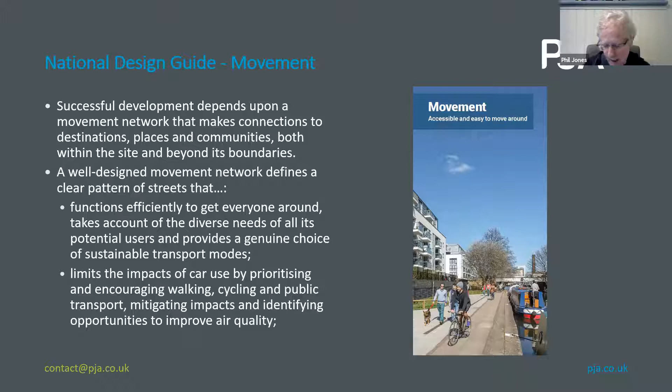Connections to destinations within the site and beyond its boundaries, clear pattern of streets, but it's all rather wordy, and I think that's perhaps one of the charges that have been levelled at the National Design Guide. I think the Model Design Code is putting a bit of meat and a bit of certainty behind that.

So we've got the Model Design Code and we've got the guidance notes where we look for some key information. Obviously it's still fairly high level. And when it comes to streets, the guidance notes and the Model Design Code refer to Manual for Streets, and we know that we are going to get a new Manual for Streets, which is going to bring together Manual for Streets 1 and 2 later this year or perhaps early next year.

The two are kind of informing each other, so the thoughts in here about typologies and how it all fits together, I'm sure will be reflected. I'm on the project board for that. I'm not involved in the writing of it this time, but I've been having conversations with the WSP-led team, with Andy Cameron and others, ITP, that are producing it. I know they're watching very carefully how this all comes down.

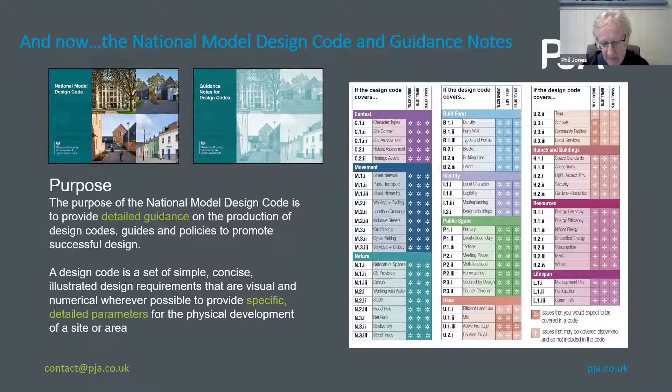So it's words like detailed guidance and specific detailed parameters that give me a bit of confidence that we're getting somewhere, because one of the charges against the original Manual for Streets is that it didn't quite hit the spot. I think there was some good stuff in it, and it did move things on, but it didn't quite have the impact that it should have done.

I remember Tim, who many of you will know was part of the drafting team, quite distinctly saying we should have as few numbers as possible. When we give people numbers, it just stops them thinking. Let's take it away and make engineers think. But of course the culture of engineers is pass fail, and understandably so, because they are held liable so often, so engineers do need some certainty.

I remember getting very cross with a highway authority DC officer who said, can't work to Manual for Streets, it's too fluffy. But I came away thinking, well, she has a point actually, and if it's not working for her, then it's not working. So I think this is a chance for a bit of a reset.

Manual for Streets said a lot about hierarchies and this idea of a dual hierarchy of movement and place. When I first saw that diagram in the Model Design Code, street hierarchy, it was purely about movement. I thought, oh gosh, are we going backwards here? It talked about the hierarchy following those movement strategies, and we seem to have lost this diagram that was in Manual for Streets and Manual for Streets 2, led by the work of Peter Jones, that talked about place status alongside movement status, giving this dual hierarchy to streets.

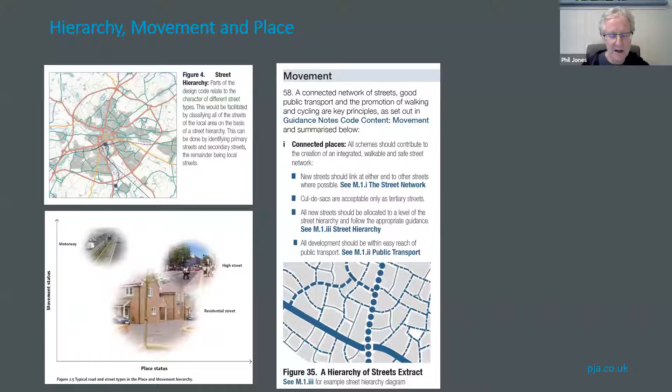But actually, I think the way it's been handled still works, because there are some good words in here. Different streets play different roles depending on movements, but then it talks about built form and the uses around the design of the street space itself. Street types include multifunctional streets, all having different place and movement functions. So I think the idea of streets having place and movement functions is in there.

We just don't see it in this sort of two-dimensional hierarchy. I know there are some big people like Colin Davis who've argued passionately that you can't put place on a graph like this, and it doesn't work. Place is too complicated, too nebulous to be put on that simple linear scale. So maybe there's something in that.

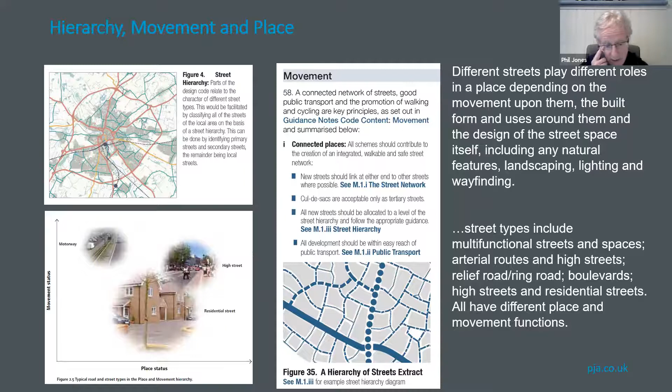So what we actually get is that all of those kind of place functions of streets are talked about in the public space section, not in the movement section. I looked at that and thought, actually that kind of works, and that's where you find the more detail about how we design these kind of linear spaces, I suppose, that we can think of them as.

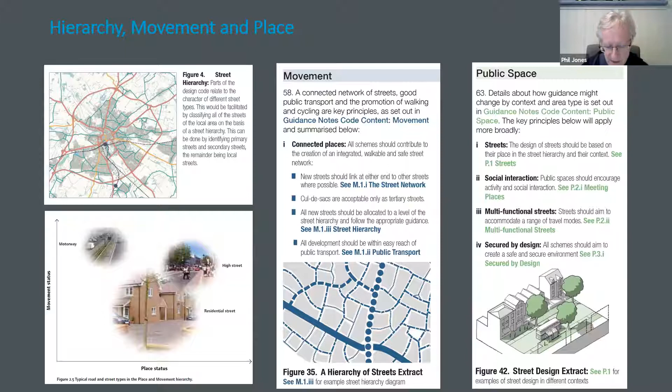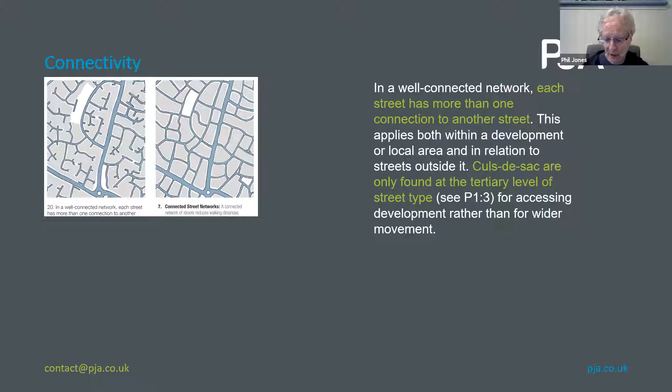Connectivity, I like the things he talked about with connectivity, and I like this simple rule, which I hope will work when developers test it: each street has more than one connection to another street, and I think that's pretty good, really. It talks about street types and within the typology says we should only have cul-de-sac at the tertiary level of street type, so that's kind of interesting. I also like what he says about filtering.

Filtered permeability. This image is from Waltham Forest, which has been held up as a really good exemplar of filtered permeability within a grid network. And it's positive about that - it talks about permeability for different users being controlled.

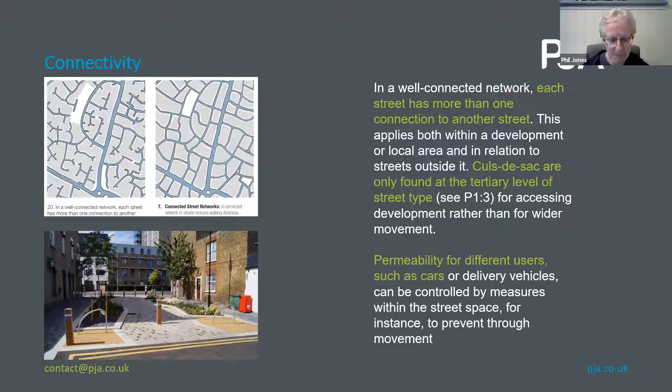By measures within the street space to prevent through movement. I like that. When Manual for Streets came out, many active travel campaigners thought it was too pro-permeability for motor traffic, and maybe this is redressing the balance - so we can have connectivity for all modes, but more connectivity for the most benign, sustainable modes. That's a really interesting development.

It gets away from so much pod development with private drives that design out connectivity and create these executive homes where people who live there prize the fact that nobody else can walk past their house - what Sue McGlynn called kinetophobia, the fear of movement. So hopefully it gets away from this.

If we're going to drive connectivity beyond the site boundary, that's going to take really robust policy or decisions by planning authorities, because it's often constrained by land ownership. Is our planning authority really going to refuse consent when there isn't more than one means of access to a site? That's going to be very interesting to see - is it going to challenge that?

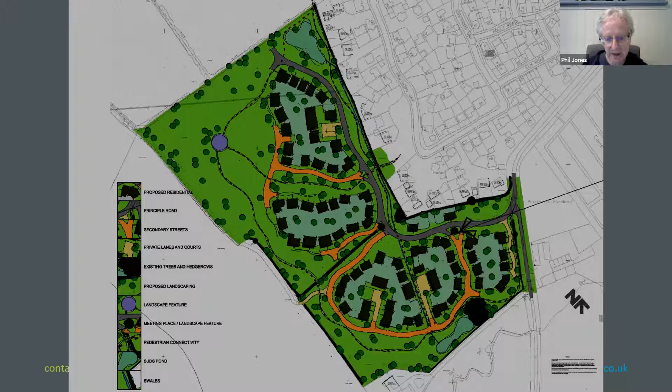I think there's some good words here about public transport being key to providing people with choice in everyday journeys. It says a site has good public transport accessibility when there's a stop within walking distance. I thought about that - actually, I'm not sure that's enough. You could achieve that if your public transport stop had one bus a week. So I question some of the stuff in here about public transport.

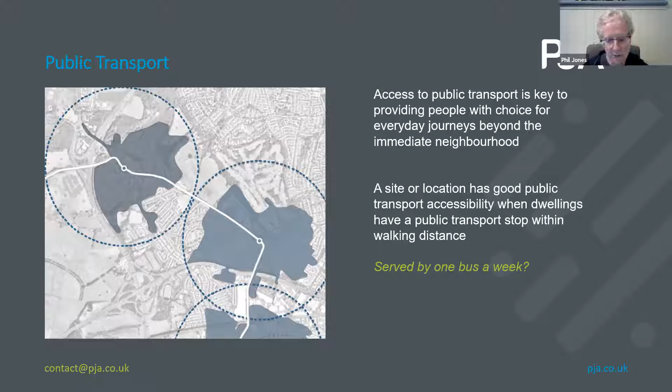There are other good references we could refer to - the work of Tim Pharoah with CIHT has some really good practical guidance on how we plan and design for buses and what good public transport access looks like. I think that little bit of the National Model Design Code probably needs a bit of beefing up.

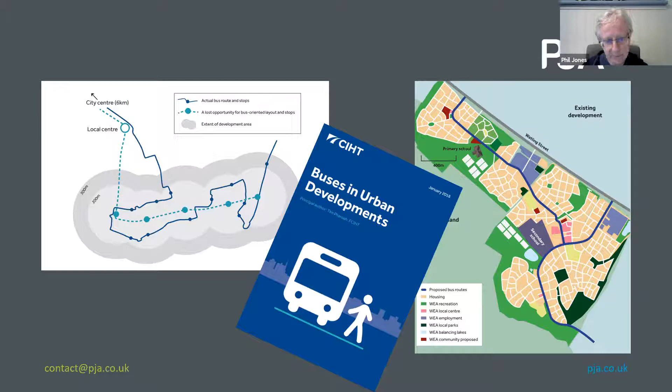But active travel is dealt with very well. It's interesting that within the guidance it's actually a tier above public transport - raised up to the level of connectivity, which perhaps shows its importance for health and well-being. There are little details too, like continuous footways slipped into the diagram - I think that's really nice.

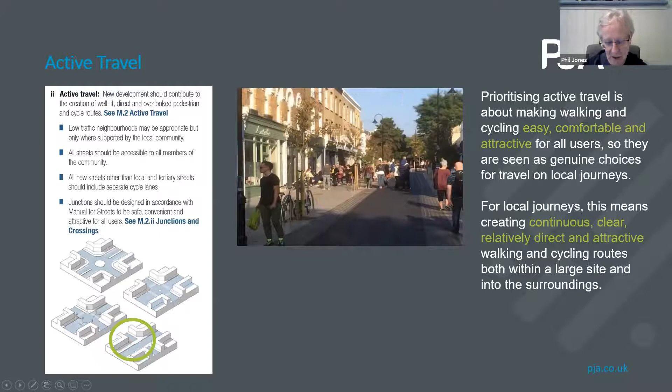Again, this is Waltham Forest. It's good to see local low traffic neighbourhoods cited - they're supported in Local Transport Note 1/20, which has just come out, and Gear Change, the government's cycling and walking plan, very positive about low traffic neighbourhoods. So it's good to see that in the National Model Design Code, but it says maybe appropriate only where supported by the local community - that's a bit weak-willed.

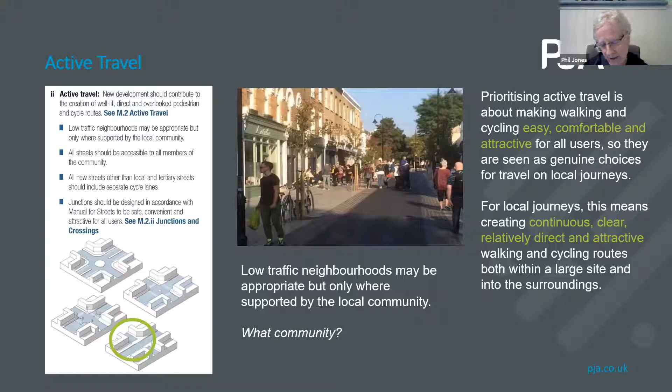Is that a kind of reaction to some of the negative press, unnecessarily negative I think, that we've seen around low traffic neighbourhoods? And if this is new build, what community can we even ask about that? So I think we could be a little bit stronger, because Active Travel England is going to be a player here. It's not mentioned, probably quite rightly, but the Department for Transport is working out what Active Travel England will do - one of its functions will be as a statutory consultee within the planning system, so we'll have something to say about that.

And then so streets and places, we find that in the public space section of the design code. So here we talk about different types of street and public space, referring back to the hierarchy. So that's all good, and we see different typologies of streets. These are exemplars, and they may not be exhaustive, and then where we might see them, and that's all going to come in the codes.

That's great, and they talk about the dual functions of movement and place. So as I say, it's in there. It's just not kind of represented in quite the same way as Manual for Streets.

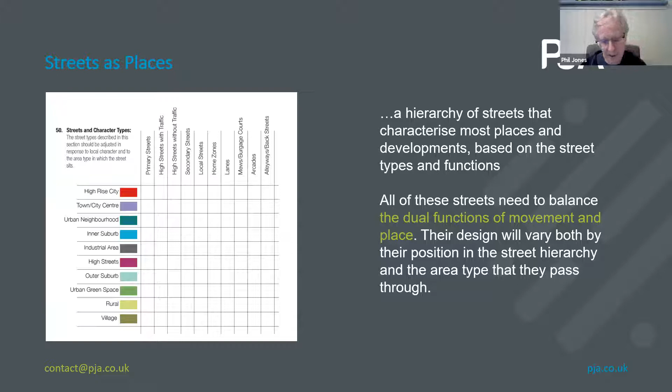And then we get the typologies, and I like that. There's some details I need to look at - are they right? It'll be interesting to see how Manual for Streets takes this forward, even though there might need to be a bit of iteration coming back. And I like the little pop-ups that work in the PDFs that tell you a bit more about it, and we get these isometrics that show the relationship between the buildings and the movement on the streets and how that all works.

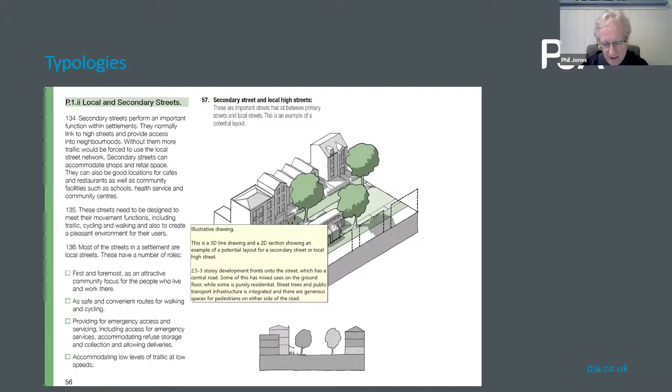So I think they're very good. And it's interesting - we've been doing some work recently for Homes England as a kind of stopgap, possibly before Manual for Streets comes along, and we're going to talk about this at their design day in April. Here we talk about typologies too, in the context of big urban extensions: principal main streets, secondary street, tertiary streets, and then edge lanes and private driveways - what features we might see, categorizing them with place, movement, access, parking, drainage, which are the street functions in Manual for Streets. So there's some kind of link up there with the thinking we've been doing, which is good.

And then the images about what green looks like for those different typologies, so this all seems to be going in the same direction. And then, of course, there's this intention that all new streets are going to include trees. That seems to me a little simplistic, and I'd be interested what others think. Obviously trees are great, we all love trees, but is it right that every street should have trees in it? I don't know, but it's in there. At the moment, very few new streets have trees, and when they do go in at planning stage, they tend to disappear. Amy Burbage of Homes England has done a great presentation about the disappearing trees between planning and implementation. So even if we get some street trees in, that's great.

So that's my final slide. I think the guidance is good, it's well structured. I think it builds on and reflects Manual for Streets principles. It's got a slightly different take on how movement and place is talked about, but I think it works. I think public transport needs a bit more detail, but I think active travel is handled well. I'm sure others will have detailed comments, but for me, I think it's a good document, and I wish it well. So thank you very much.

Helen is a planner and urban designer and has extensive experience of working with and for local authorities. Helen was a planning and design quality lead at Homes England and has therefore substantial knowledge of planning and delivering large-scale and complex development. Currently, she's Principal Strategic Planning Officer at North Hertfordshire District Council. Helen, over to you.

Yes, so my presentation looks at securing quality through the planning system and how the National Model Design Code fits into that. And that's the current planning system we have, not the one suggested in the planning white paper. So to me, good design is a key aspect of sustainable development and is indivisible from good planning. This well-known line from planning guidance over many years has now been lost, which I think is a real shame, as it decouples that important link. The focus now seems to be on the appearance and aesthetic value of design rather than sustainable function.

Oops, it's just stuck. It's frozen - maybe you want to go out of screen share and back in again? Oh no, it's okay now. It's just having a little think.

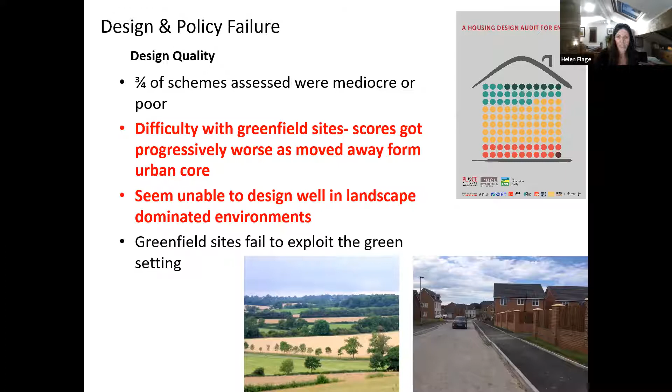So whilst it's unacceptable to have such poorly designed developments, a lot of these developments also have very poor or no green infrastructure and have led to more loss of nature and a negative environmental impact. So there's been a policy failure to deliver design quality, and for me, one of the key failings is the inability to plan and design in a green setting.

It's interesting to look at this, because what do the statutory and policy requirements actually require planners to do? We're only actually required in our local plans to identify allocations on a proposals map with a red edge, what I call the blob. Our system, in terms of the development management order, only requires a red line to be submitted for outline planning applications with an indication of where access is going to be taken, if that's a reserve matter. Then a design and access statement that in the worst cases just describes a poor layout with lots of illustrative material.

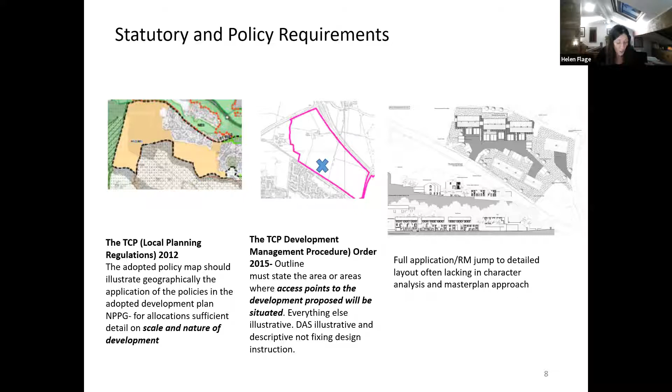So how do we planners try and secure design quality through the planning system? To address those failings, lots of planning authorities try and go above and beyond to try and secure quality. A key tool for authorities is the master plan. The master plan is the most common design tool used by local authorities, and a master plan is the spatial interpretation of a vision.

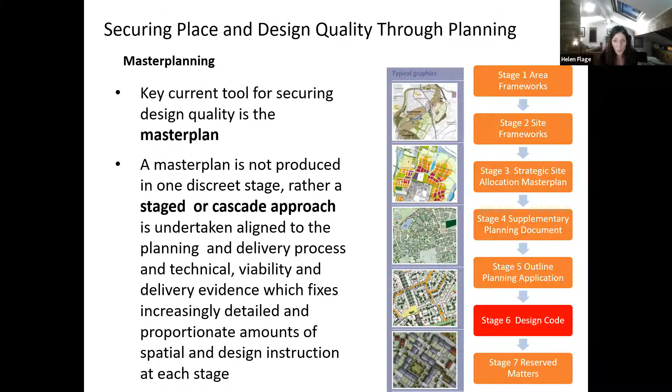But it's not produced in one stage, it's produced in a staged or cascade approach, which is undertaken aligned to the planning and delivery process and the technical and viability evidence. So it fixes increasing detailed amounts of spatial and design instruction at each stage. Just to quickly look at those stages.

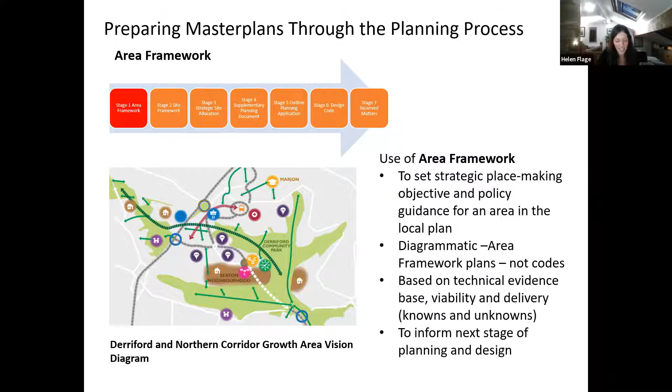Area framework plans are produced as part of a local plan, and these set out high-level structuring and organising principles for an area or a site in a spatial diagram, based on a proportionate evidence base. This is an example from a local plan, the Plymouth local plan around Derriford. So this framework plan is providing the same in relation to a commercial district centre that requires major redevelopment. It's setting a framework, not a code, a framework to guide further design development when technical information and market conditions allow.

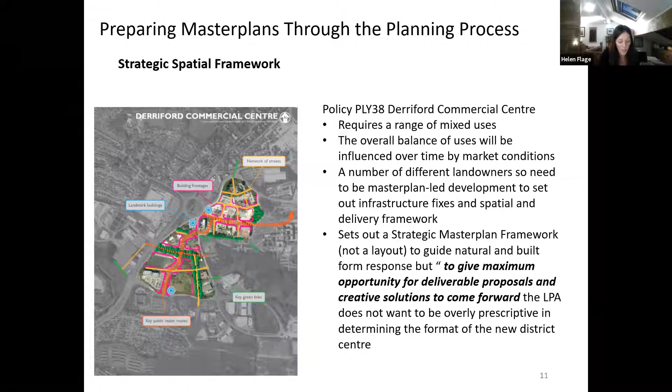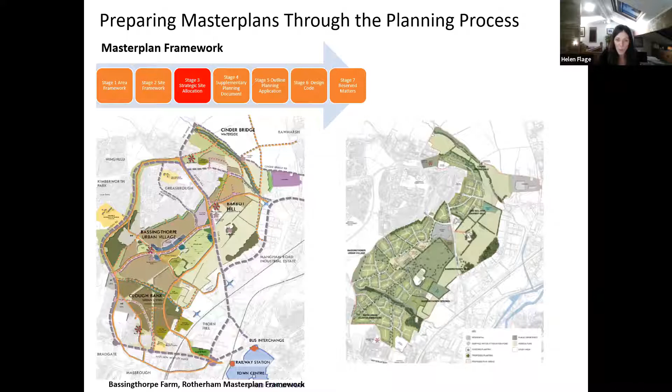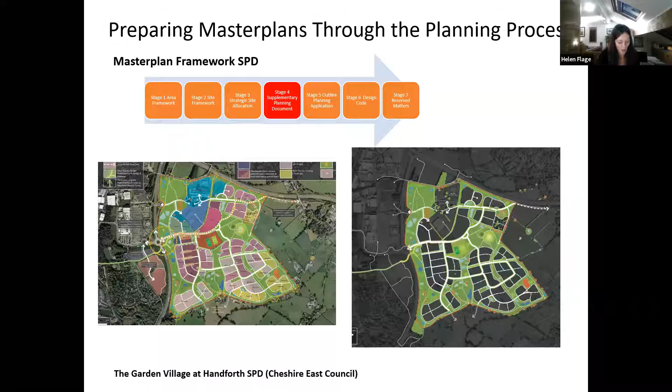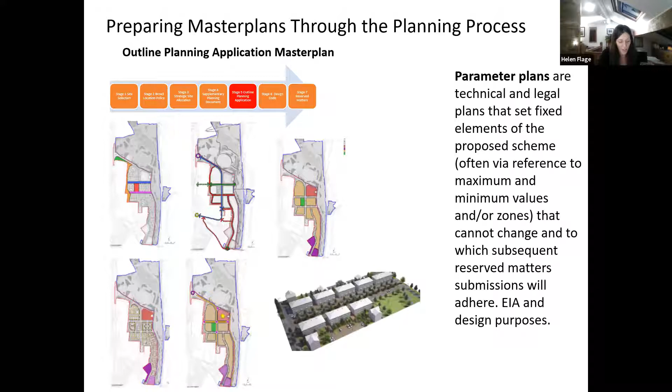In terms of outline planning applications, if a development requires an EIA, then parameter plans need to be produced to enable the environmental impact to be assessed and mitigated. Parameter plans can, at the local authority's discretion, also be used to fix design matters, but legislation doesn't require this.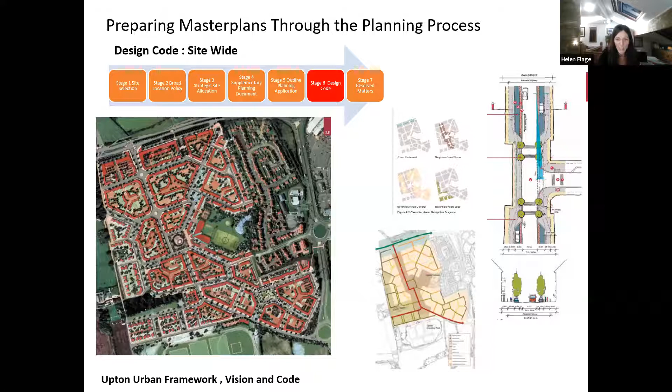In terms of design codes, they're frequently used at the moment in practice, usually for large sites, more than 500 units, either site-wide, as this well-known design code at Upton shows, with a regulating plan and clear design instruction, or for very large sites, they're produced on a phased basis. They can only be implemented if a detailed master plan has been produced that provides the spatial vision accompanied by a regulating plan — that's the plan on the right here.

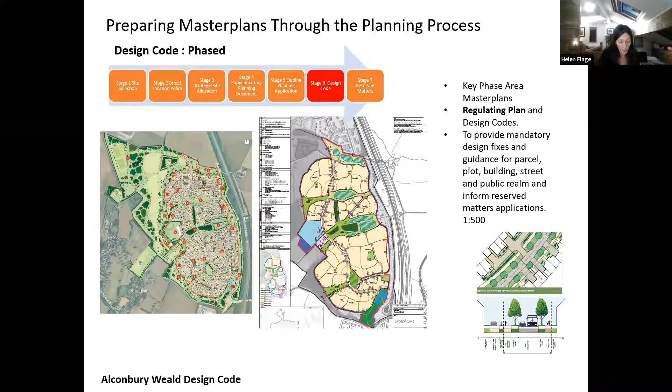And they're most commonly produced at the moment as a pre-commencement condition on an outline permission, but they can also be adopted as supplementary planning documents. Importantly, they are produced close to the point of delivery when there's sufficient market and technical information available.

And finally, reserved matters. In terms of the steps that the government could take to better embed place and design quality in the planning system, it could require local planning authorities to produce area and site-specific master plan frameworks in their local plans that would then receive full policy weight, and they could also change the development management order back to how it used to function in 2006, with a set of parameter plans to fix design quality.

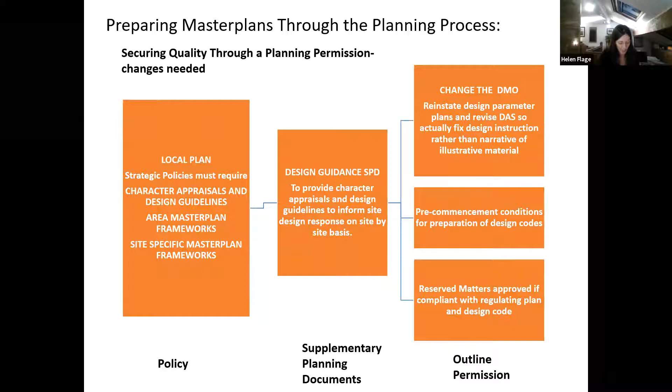These would be needed to validate outline planning applications, together with a complete rehaul of the design and access statement system, so that they actually fix design, instruction and intent.

So how does the National Model Design Code change things? Well, it's not introducing anything particularly new — it's based on lots of previous guidance that's been produced in the past, but obviously it's been updated. In terms of implementing such area and site-wide codes, the NPPF, as to be amended, requires local planning authorities to prepare design codes or guides, and these should be produced as part of the plan or as a supplementary planning document. So importantly, the NPPF isn't going to say local authorities have to produce codes — they can just produce a guide. And that's an important point.

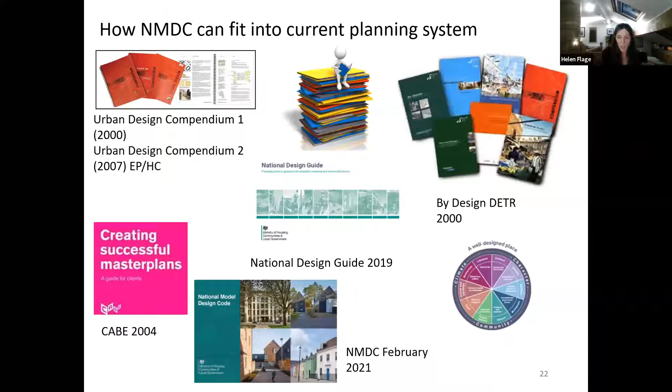It would be possible to set out in strategic policies in a local plan where master plans and design codes should be produced on an area-wide or site-specific basis, and that currently happens in practice anyway. So adopting a design guide or code as a supplementary planning document is the most sensible route to ensuring it receives sufficient weight in decision-making as a material consideration, but you'll need a policy hook to do this. Requiring better design documentation to support planning applications is possible at the local authority's discretion, and local planning authorities can attach a requirement for a site-specific design code as a condition.

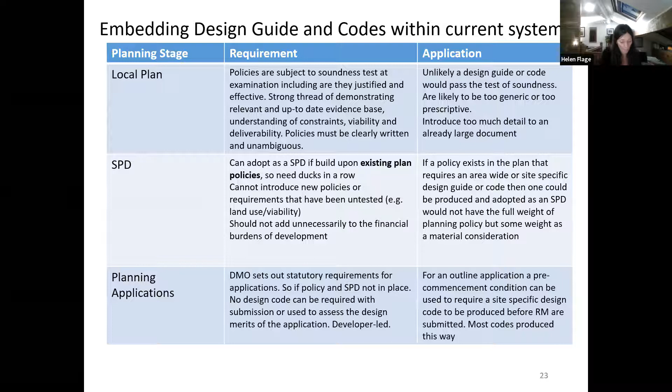So some final observations I have on the National Model Design Code relate firstly to terminology. There's a new definition of a design code in the guidance that differs from the definition in the National Design Guide and NPPF, and this new definition seems to decouple the design code from a master plan. Design guides and codes are used together throughout the document, but they're very different things - a code needs a regulating plan and a guide does not. Parameter plans are used a bit out of context, which could be misleading.

I think there's an underestimation of the analysis required to accurately fix design instruction, especially for large sites. This table and these plans set out the typical information you need to fix design decision-making and instruction, particularly for larger sites. So I think there's a bit of an oversimplification of the master planning and coding process for larger sites.

And there's a lack of reference to other planning and environmental legislation that design decisions can impact on, and how this would be taken account of in the coding process. The area types set out feel like a slight oversimplification of reality - I think many areas straddle these zones and need comprehensive redevelopment, and coding them would be a superficial exercise without the evidence, master planning, and market realism required.

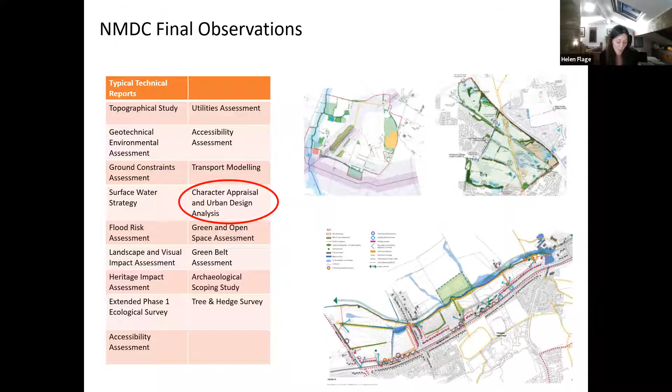So there's a risk of coding leading to a traditional approach that might not necessarily embrace working towards zero carbon and using environmental technologies. Finally, from a town and country planning perspective, I find the guide a little bit too urban design led, which you might not want to hear.

And I'm not convinced that the street, the block, and the public square should be the primary organising components for new places, especially on greenfield sites. And I don't think this has worked.

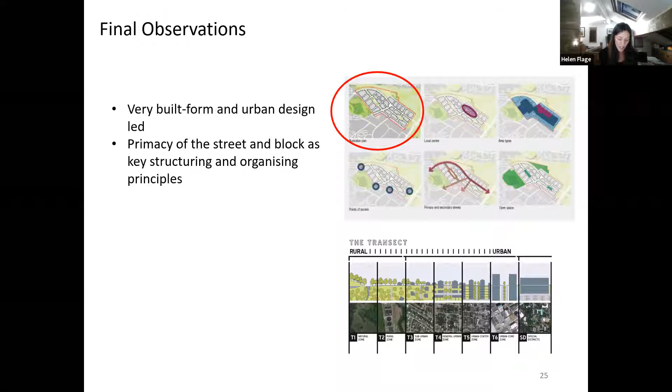So I think we need a more landscape-led approach that prioritises spaces and routes for people and nature, and that green infrastructure is used as a key structuring element in how we plan and design, rather than a second thought. This will help restore nature, mitigate and adapt to climate change, and restore public life, reconnecting people to each other and also with our environment.

So that's the end of my presentation.

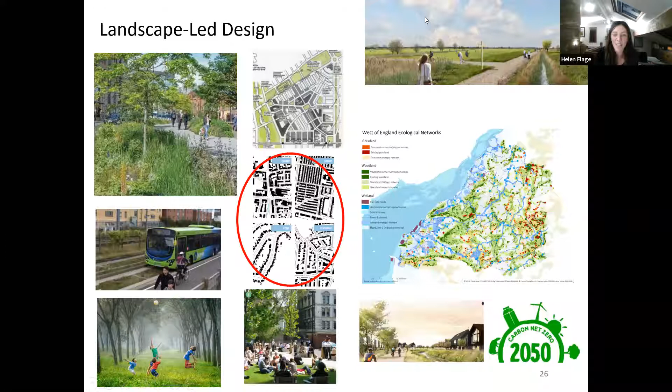Thank you very much, Helen. I like your call for more integration of landscape and the environment - I think we've all experienced how important it is in the last year. I think another point you made leads us nicely onto Tony, and that's market realism. I would have to go back to the code about how much it actually says about having that evidence base of what's deliverable and achievable, but maybe somebody else knows more about what the code actually says on that subject.

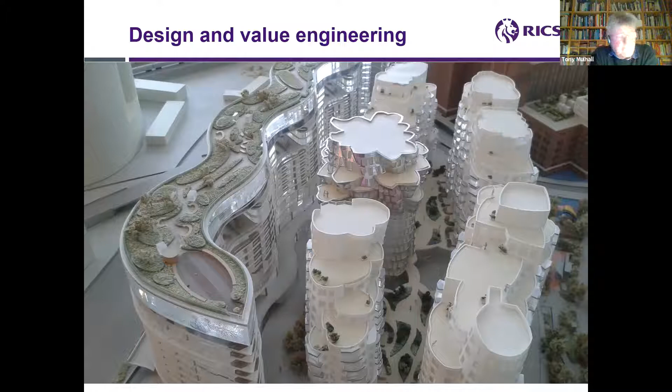Now, it will be very interesting to see where the private garden and outside space has moved in the light of our experience up to now.

I have nothing left to say other than thank you for listening. It's a very interesting area, and we're very interested in how this interfaces with market behaviors and how design can be used by developers and how they can be encouraged to create great places, design them well, and get the benefits both for their customers and for themselves, and deliver better places for us to live in. So thank you very much.

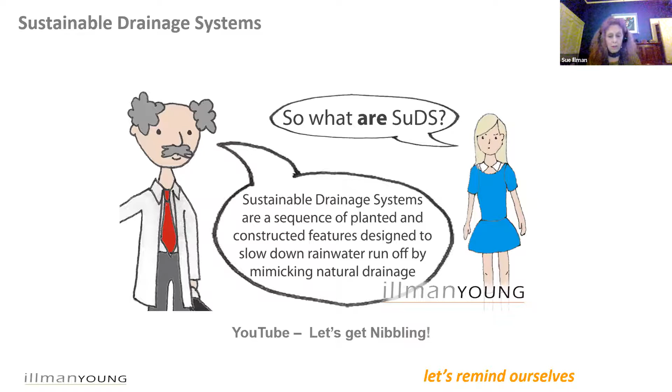This is one way that we can start to rectify some of those things through what we do on a day-to-day basis in terms of our design.

Having gone through this to see where we sit, it's interesting that SuDS comes into the document under nature, which I thought was an interesting place for it to be - quite surprising. It took me a while to actually find that that's where it was lurking.

But when we drill down into the documents and think about what it is, almost every plan showed the water that went through the towns and cities used to illustrate this document, because historically, towns and cities tended to be built on rivers or by the sea, since the need for that mode of transport was an important part of why they were sited there. But the consequence of that, with the way development has gone over time, and the changes in the climate, means these are the areas now most vulnerable to flooding.

And the more we develop on our suburbs, the more we can intensify that problem as well. So the issue of flood risk has to be a major consideration in what we're doing in terms of all new development. That filters down through the existing, the potential proposed as we add on to that, and how we can mitigate it through major water management measures - but more importantly, through what we do every day on each new site we're working on.

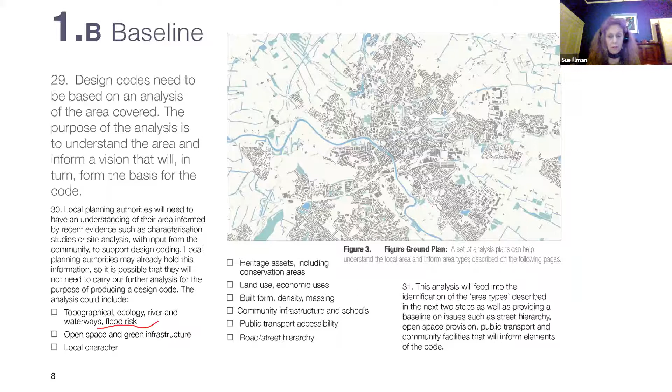Looking at this next one, we're now stuck in open space provision. There's this vision that SuDS is mainly about what you do in public open space with another bomb crater, otherwise known as a pond. We are so far away from the original concept of what it was intended to be, compared to how we see it rolled out in most housing developments going through planning at the moment. The answer at the moment is pipe to pond - that's actually just traditional drainage. That's nothing to do with SuDS.

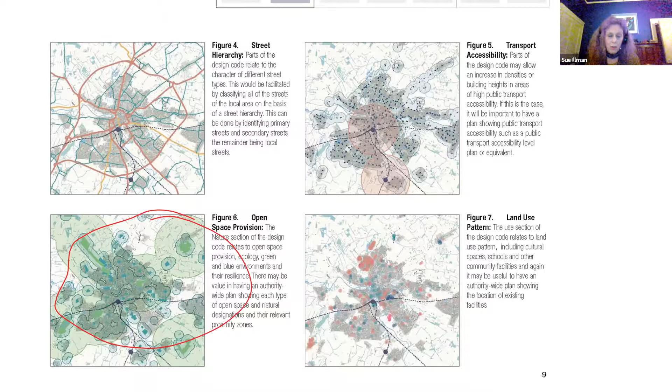Now, there's hope there because research has been done for DEFRA, looking at how we need to reframe what SuDS are all about. We know what we need to do, we know how we need to change the policies, but we're not there yet with doing it. So I see some hope for that, but we've got to see that roll out through the professions and through that wider understanding, and through actually engaging with what it means to deliver integrated design.

So then when we look at some of these diagrams, well, it doesn't feature anywhere at all. Now you could say, no, because that's not what this is all about.

We're looking at this bigger picture and it's probably tucked into that open space somewhere, but what about those streets? What about those houses? They've all got downpipes, hard surfaces, roads and footpaths. Where's that water going? That's what's going to cause the localized flooding that's the bane of people's lives.

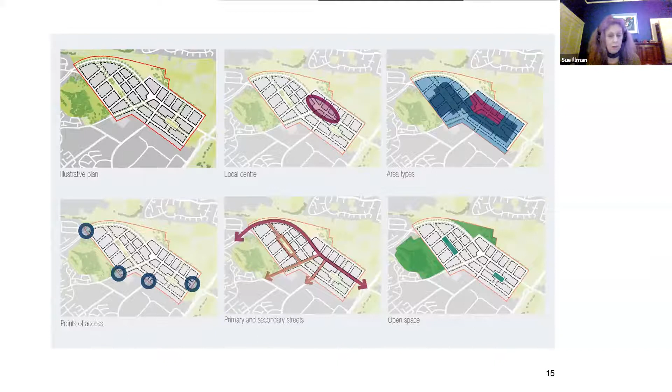That everyday low incidence of flooding that is non-selective about the people it damages, and how additional sites and consequential effects that haven't been thought through properly, not properly implemented, cause problems in new build as much as in existing housing areas. So here we go again, we're back in nature. We've got a good mention here: SuDS and urban greening. Those two things can and do go hand in hand, but they don't have to.

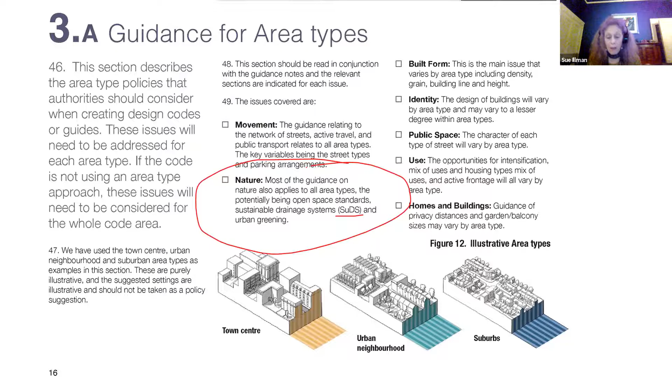If we think about where we should be starting from, we should be avoiding that water going anywhere at all. So, slightly off-piste, we're going to talk about rainwater harvesting, the reuse and management of water—it's a precious resource to use better. But then what are we doing on our roofs? How are we going to actually save it on each site? Then we can talk about how we're going to manage what we haven't dealt with close to where it falls, through all those other design interventions we can and should be using well, and not these simplistic bomb ponds at the end of a pipe.

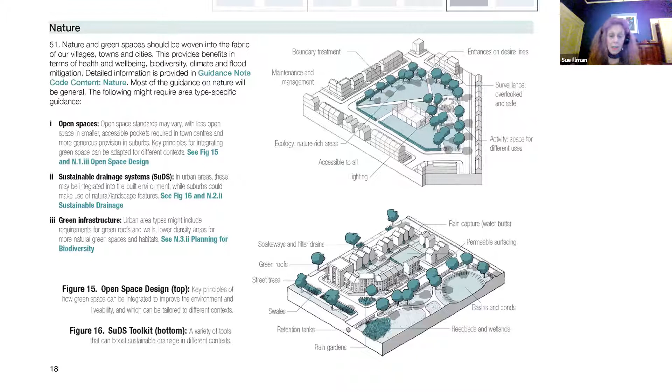This is an example of how we can fit all this stuff in a different way. This is the approach we should be taking in each of these little models, because we actually have to do it on everything, all the time, everywhere. It's quite simple—it's about changing mindsets, understanding its potential, understanding how we can use it as part of integrated design, and actually just getting on with it.

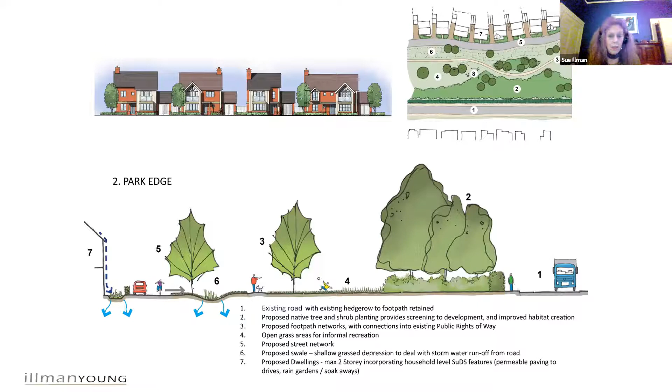So there we go, we've got these lovely little sections of different streets and different types of neighborhoods. Nothing in there, but we can equally produce examples that show exactly how you can integrate it within the streets as just something else that we do. And we can get those trees in there, and they can sit in the SuDS as well. Why not? Ideal—keeps them away from the buildings, keeps them contained, and has the right function.

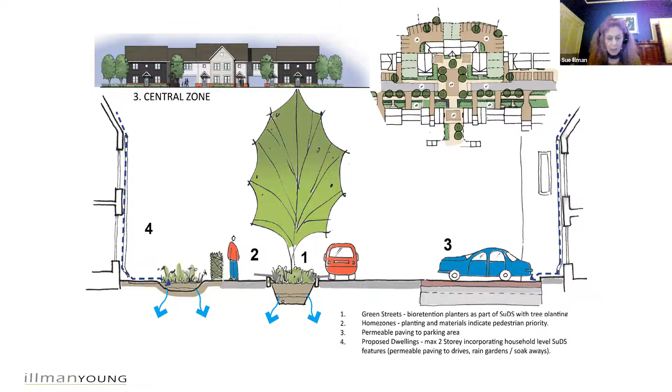We can take these up to every level of detailed design and density, but we have to be more creative, using permeable paving and all these other techniques. SuDS on the surface is where we need it to be. Taking it to a whole neighborhood, there you go—it looks really complex, but it's actually no more complex than a pipe system coming out of a building. It's just doing it in a completely different way.

That's where the need for real good interprofessional understanding comes in—from civil engineers, highway engineers, architects, planners, everybody—to actually see what this potential is, because we don't have enough good new build examples in housing schemes to get it through, from the really good quality ones who embrace it, to those at the other end of the scale.

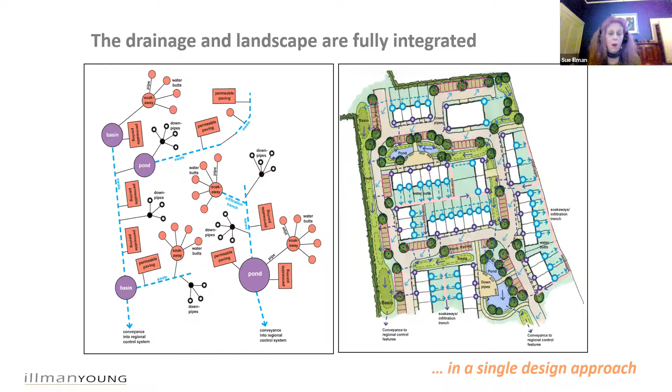But if you go to Wales, we're seeing this being rolled out for all new social housing. And if it can be done there, it can be done anywhere. Why not? We just need those exemplars.

So yes, we can have lovely retrofit schemes—we need them, we want them. It's making our high streets, and this is really important, revitalization of the high streets, making our high streets nicer places to be with good quality urban design, of which SuDS can play a part.

And we can take other bigger schemes where, in this instance in Sheffield, things have changed and nobody needs this massive highway anymore, turning it into something that actually delivers infrastructure, transport, cycle routes, places for people to walk to work, taking detours to come down here and sit in their lunch hour and enjoy being in the urban environment—because all of this is SuDS. It's green infrastructure, linear corridors, nature and biodiversity coming together in an intelligent and creative way.

Or we can just have the odd urban square and place where actually the SuDS feature is really just an ornamental thing. I'm very sad to say that I can't show you lots of lovely new housing schemes where this has been done really well, because it's really hard to find them. And that, I think, is very sad.

And that, for me, is the big challenge for where we go with this whole new concept of how we want to design our places. But we must do it by integrating water management. Thank you.

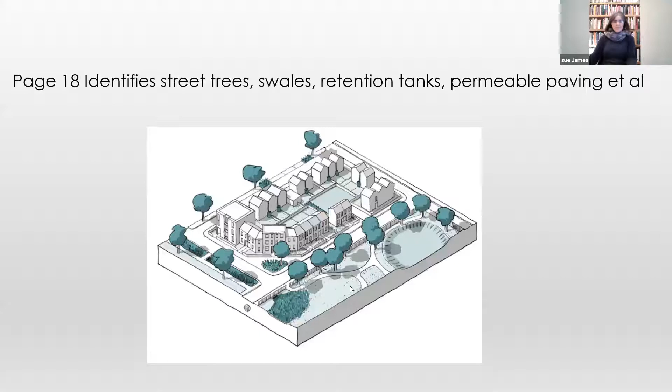What does the design guide say about trees? Here's our little diagram, and we've got some street trees with all the various elements that go with trees. I don't think the trees are actually integrated with the SuDS there though, and I think that's something we should take up. Page 30 says that all new streets should include street trees. I'm not sure how realistic that is, but equally, it would be worth highlighting the benefits of having trees, their ability to store carbon, sequester carbon, remove pollution.

Help with rainfall interception, all these kind of things. But equally, there's a little encouragement because I see a tree has been allowed to replace what might have been some car parking area. And maybe that's the beginning of taking space for other uses than just cars. And I think it was in the design code that actually said, how do we actually encourage less dependence on private cars?

I did eventually, thanks to somebody on the call, find street trees extract Code Note N.3.iii. I didn't find it immediately, and somebody pointed it out to me. It didn't actually say very much about street trees and design principles, so I don't think we should count on that.

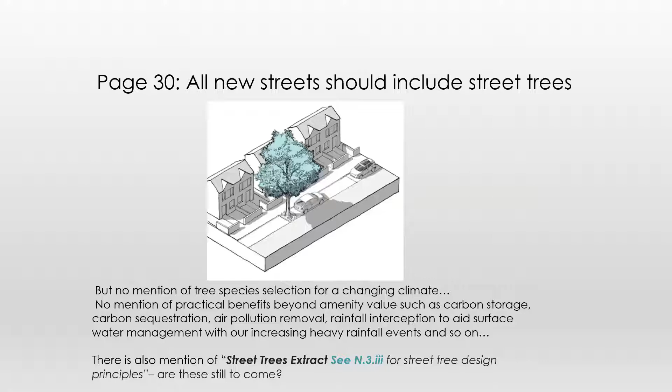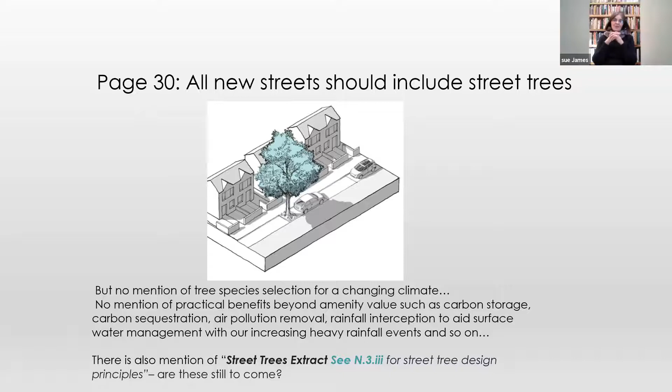Did you hear? Don't worry, go on. Is it still working? Yeah, it's still working. Okay, so all new streets should include trees on page 30. Whoops, that's slipped, hasn't it?

So, however, help is at hand. If you go to TDAG's Trees and Hard Landscapes, it will actually show you how to overcome some of these problems and find practical solutions. But there are other things in the guide, again, where the drawing has opened a question, but hasn't actually mentioned it or seen it as a problem.

So here we've got a tree on a street near a house. Well, what's the underlying geology? Is it a shrinkable soil? What's the danger of subsidence? All new dwellings or low-rise buildings on shrinkable soils should have resilient foundations that can accommodate trees and reduce the use of concrete, of course.

But this means that Building Regs Approved Document A needs to be updated. NHBC chapter 4.2 needs to be revised. Insurance companies need to stop asking you in the small print whether you've got a tree within X meters of your house. So it's no use showing a little diagram about what could be done when underneath that is a whole series of things that need to happen if it is to be done.

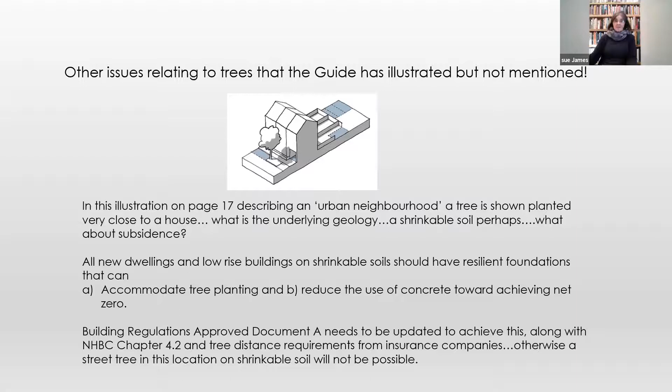And shockingly, there was no mention of all the Trees and Design Action Group work, which I'm going to highlight because so many of you are members and a lot of you volunteer your time to help produce these guides, and they really do answer a lot of the questions that the model design code failed to address.

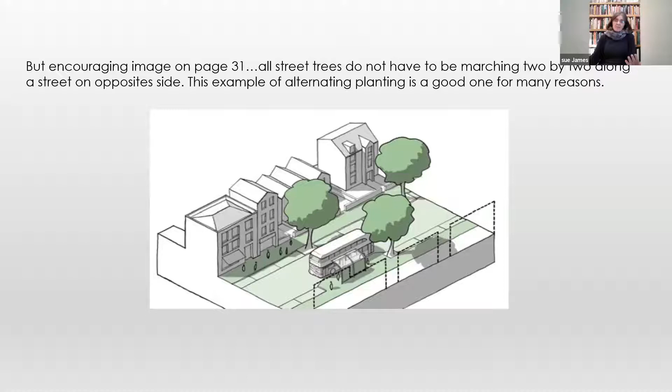Encouraging images, page 31. So when people are talking about street trees, let's get out of our minds the idea that you have to have serried ranks of pairs of trees just marching along the street. There are many ways in which you can integrate and introduce trees into streets without simply lining them with trees. You can do alternate planting, highlight crossing places, make landmark links. It's not just rows of trees in streets.

When you come to look at designing with trees, you've got to ask yourself some real questions. What are you trying to do here? What's the purpose of planting the trees? What's the brief? What are the benefits you're trying to achieve? Where's it going? That will influence the way you plant them. If they're in a very hard urban landscape, you'll have to plant them very differently than if they're in a grass verge with adjacent open front gardens, which give more opportunities for tree roots.

Will the trees be adopted? If they're in streets, are highway authorities going to adopt them? There's a resistance to do that, but that's why we have to bring the highway authorities along with others.

What's the long-term management and maintenance plan? And what's the level of investment? Do we understand the level of investment needed? Because when we talk about planting trees, we actually need to mean planting plus 5 or 10 years until the tree is established as independent in the landscape, as part of that initial capital expenditure and investment.

How can planning support tree planting? The England tree strategy must be enshrined in law. At one point a couple of years ago, we nearly achieved that, but number 10 pushed us back apparently. All local authorities must have tree strategies, and they must be embedded in their local plans and be legally binding. And tree strategies must not be confused with green infrastructure strategies, or be a subset of them.